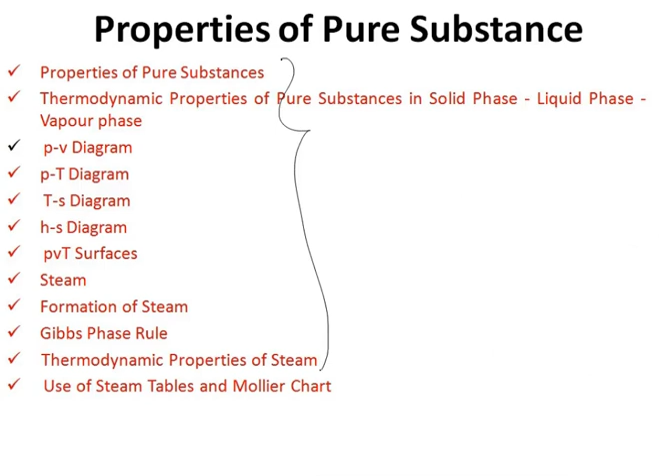Pure substance is a system which is homogeneous in composition, homogeneous in chemical aggregation, and invariable in chemical aggregation. Homogeneous in composition means the composition of each part of the system is the same. If I have a system like this, whatever composition I have here, the same composition I will have at other parts of the system also.

Next is homogeneous in chemical aggregation. This means the chemical elements are combined chemically in the same way as in other parts of the system. Suppose I have H2O at the top, so two hydrogen atoms and one oxygen atom combined to form a water molecule, or steam. At all parts of the system, it should be chemically combined in the same way.

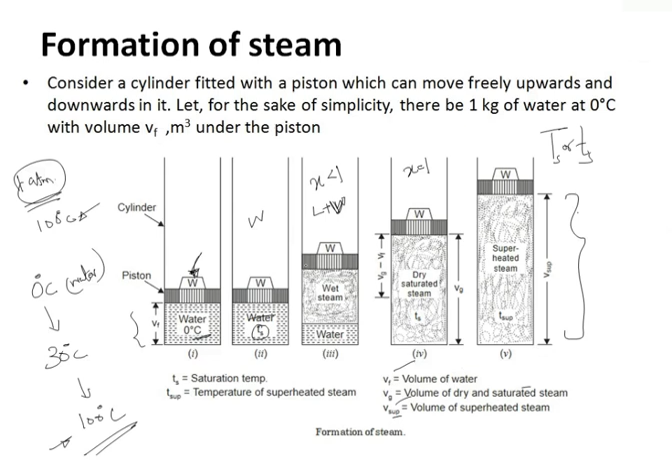So Vf is the volume of water, Vg is the volume of dry saturated steam, and V sup is the volume of superheated steam. So this is how steam is formed from water.

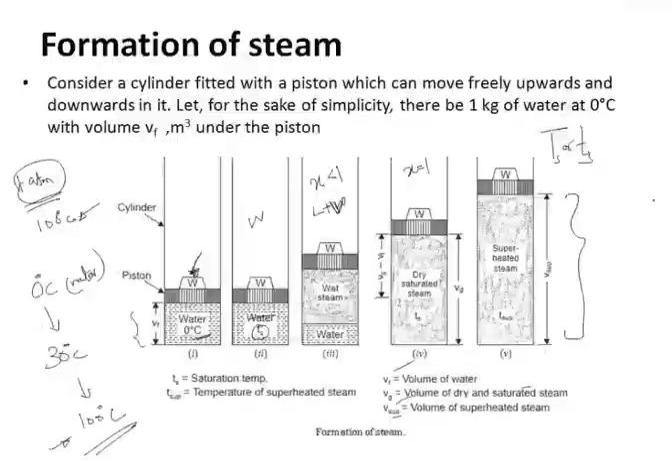So the heat which is absorbed by 1 kg of water when it is heated from the freezing point to the boiling point is called the sensible heat of water. So sensible heat of water is heat that, if you apply it, the temperature rises but no change of phase takes place. So two things you have to understand: the temperature increases and there is no change of phase in sensible heating. So that heat is called the sensible heat of water, indicated by the term HF.

Next is the latent heat or hidden heat. It is the amount of heat required to convert water at a given temperature and pressure into steam at the same temperature and pressure.

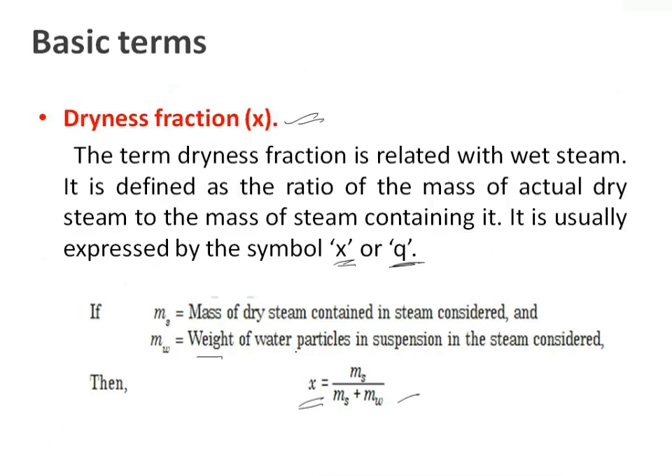Next is the saturation pressure. The temperature at which the vaporization takes place at a given pressure is called the saturation temperature, and that corresponding pressure is called the saturation pressure.

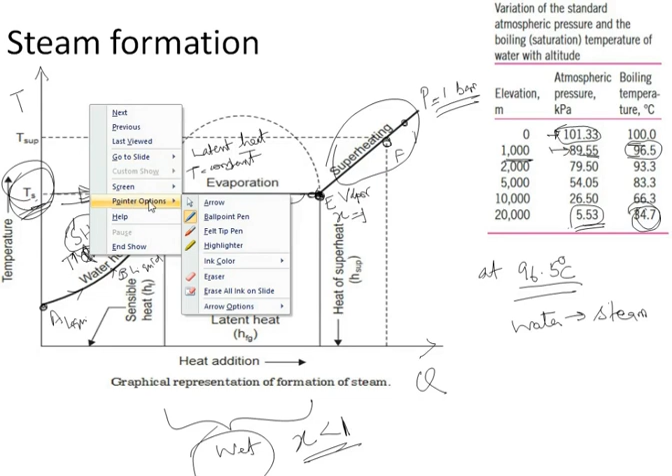Let us see from the diagram. I am having a curve like this, at a constant pressure. Suppose this pressure is 1 bar or 2 bar. So for this pressure, I will be having this saturation temperature.

Suppose if I increase the pressure from 1 bar to 1.5 or 2 bar, what happens? This curve will be shifting to an upper line. So initially I have a curve like this, then if I increase the pressure, the curve shifts to a higher level. So if you compare this value and this value, what happens?

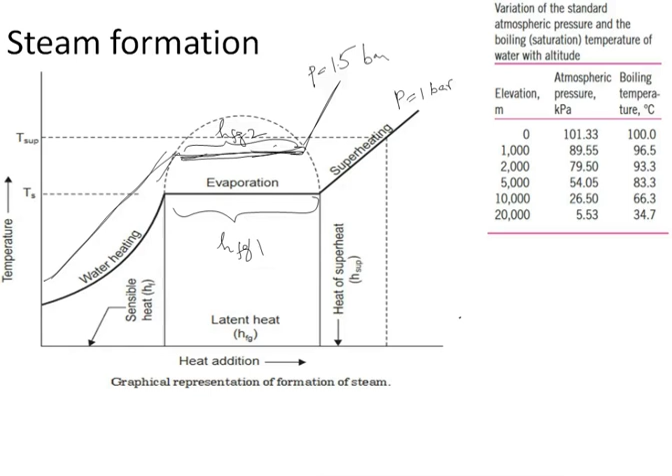The HFG value, keep this as HFG1 and this as HFG2, with pressure P2 and P1. Pressure P1 is 1 bar and pressure P2 is 1.5 bar. So if you increase the pressure, what happens to HFG? This is your HFG2 and this is your HFG1. On increasing the pressure, your HFG value decreases.

This temperature at which the liquid changes to vapor is called the saturation temperature. So this temperature for this curve is the saturation temperature, keep this as TS1. At pressure P1, the saturation temperature is TS1, but at pressure P2, your saturation temperature shifts to a higher level, that is TS2. So for each pressure, you will have a saturation temperature. The temperature at which liquid is converted into steam is called saturation temperature, and the pressure at which this transition takes place is called saturation pressure.

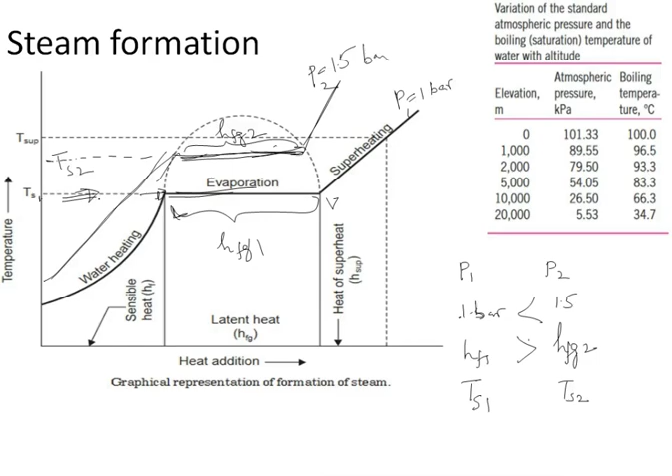Next is the total heat or enthalpy of wet steam. Let me draw a diagram and then explain.

On a plot of temperature versus heat addition, or enthalpy Q, if I add heat, what happens? The temperature increases, and at this point you have a liquid. If I add heat here, the liquid will be converted into vapor. And again, on further addition of heat, what happens?

The temperature increases. If I have steam at this point, then from here to here, the heat which I am applying is called HF. And from point L to B, the heat I am giving is called HFG. So if your steam is at point 1, what will be the total heat? The total heat will be H equals HF plus HFG.

But consider any point 2. This point is between L and B, that is, it is in the wet region. If it is in the wet region, what will be the total enthalpy? It will be HF plus X into HFG. Similarly, you can write for superheated steam also.

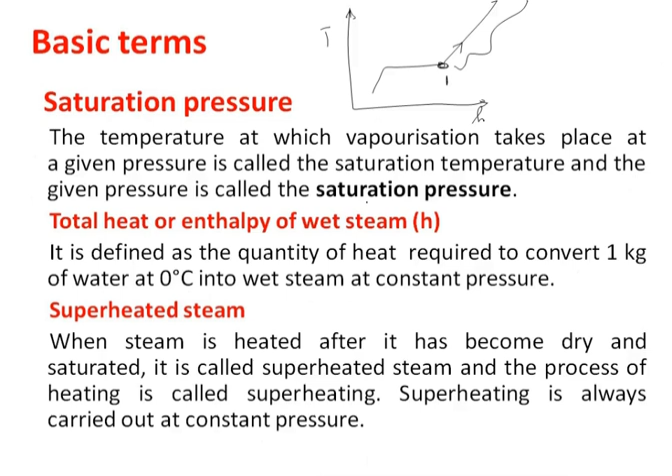After this point 1, if I heat, the steam will be converted into superheated steam, and that process is called superheating. So what is meant by superheating? It is a process of heating the dry and saturated steam. This superheating is carried out at constant pressure.

Next is compressed liquid. If water exists in the liquid phase and it is not about to vaporize, then it is called a compressed liquid. In the same diagram, temperature versus heat addition, you will have the curve. Here it will be liquid and here vapor. Between liquid and vapor you have the wet region, and here the superheated region. At this point L, if you apply heat, what happens? The water will be vaporizing.

This is the point at which the water is about to vaporize on heating. Below this point, in this region, the water will not be vaporizing, so this liquid is called a compressed liquid. Not about to vaporize means in this region. After coming to the saturation temperature only, it will start vaporizing. So below the saturation temperature it will not vaporize. The liquid at a temperature below the saturation temperature is called a compressed liquid.

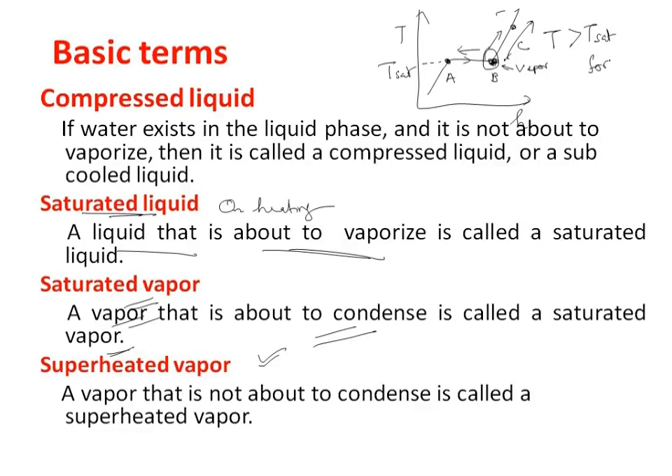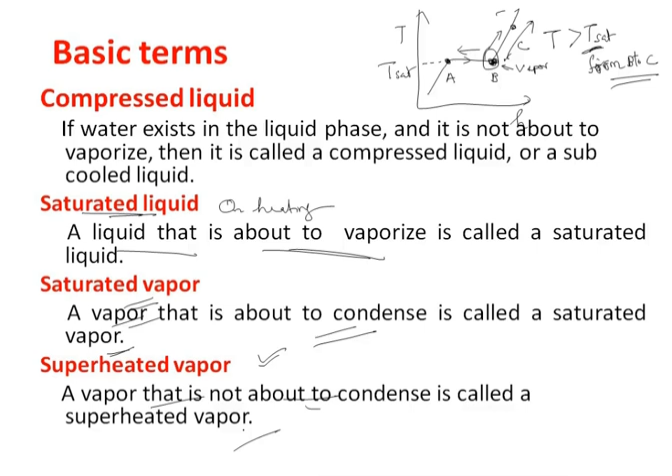Next is superheated vapor. Only at point B will the vapor be in a stage about to condense. Above this point, the temperature will be greater than the saturation temperature. So from point B to C, the temperature is greater than the saturation temperature. If it is only at saturation temperature, it will condense, but if it is above saturation temperature, the steam won't condense, or is not in a position to condense. So that vapor is called superheated vapor - a vapor that is not about to condense is called a superheated vapor.

Next is the TV diagram. Just have a look at this TV diagram for 1 minute. See what you are able to understand from this diagram. What is the x-axis, what is the y-axis, and what is the curve? Just have a look.

So in the y-axis, I am having temperature. In the x-axis, I am having volume. Here I am having a curve like this. This curve corresponds to a constant pressure, a pressure of 1 atmosphere. So at 1 atmosphere, if you heat water, you will be having a curve like this: an inclined line, a horizontal line, and then an inclined line. So this is at a particular pressure.

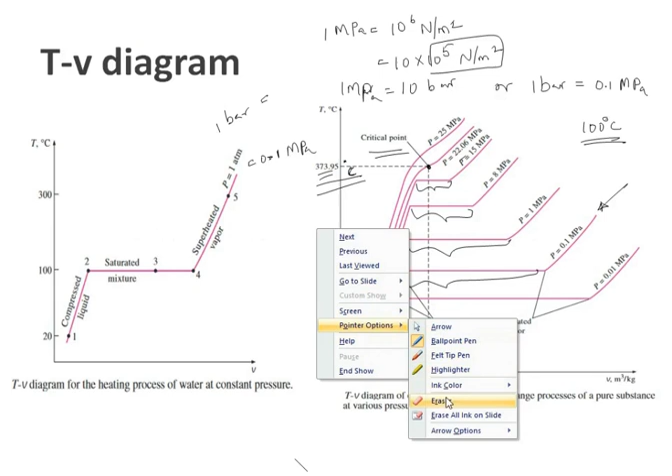So from this diagram, if you see, keep it as curve A, B, C, D, E, F - like this, you give names for these curves. In curve A, this is the liquid, L1 is the liquid phase. So here, the water will be in liquid phase, about to vaporize.

If you apply heat, it will start converting to vapor. In curve B at L2, if you apply heat, it will start converting to vapor. Similarly at L3, L4, it will start converting to vapor phase.

Next, come to this side, in the same curve, saturated vapor. If you are having curve A, at this point V1 - at point 1, what happens? It transforms from dry saturated steam to superheated steam at this point. Similarly, you can say for the other curves.

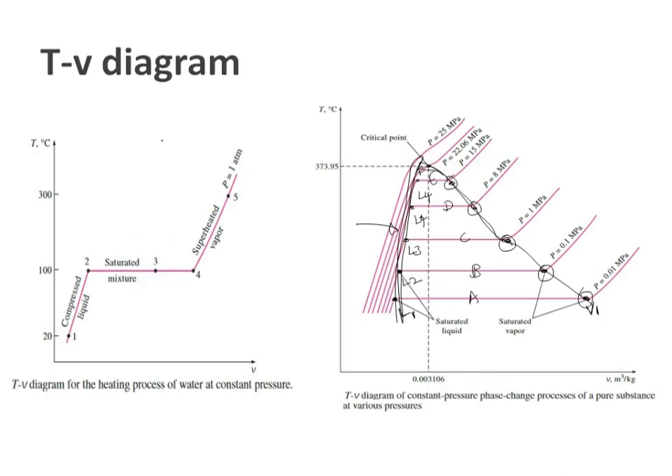So if you connect all these L points, you will get a line, and similarly, if you connect all these vapor points, you will be getting a line. The line connecting all the V points is called the saturated vapor line, and the line joining the liquid points is called the saturated liquid line. This is the TV diagram of a pure substance on heating, or the TV diagram of water at constant pressure. The left side figure shows the heating process, TV diagram of water corresponding to heating at a pressure of 1 atmosphere, and this diagram shows the same heating but under different pressures.